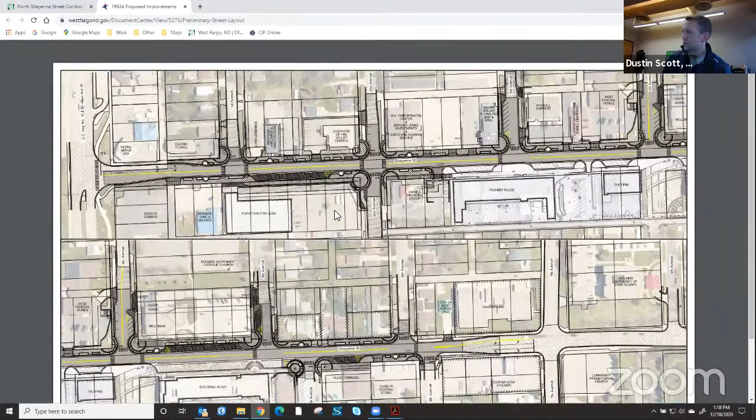So what you see on the screen now, I hope, is the street view, proposed street layout. On the left side of the screen, on the top left, is the north side of the project. I hope you can see my cursor. This is the intersection at Main Avenue.

As you can see, the project continues south, often referred to as a road diet. The intent here is to narrow up the street in terms of the traveled lanes, basically removing the center turn lane that is currently in place and going down to a 2-lane street section with on-street parking on the west side, as well as some on-street parking on the east side, a little further south towards the project limits.

We are also taking the opportunity to redo some of these side streets. Starting especially at 3rd Avenue, and then of course at 4th, we are also adding some parking onto those side streets as well.

Now coming down to the bottom half of the screen, starting on the left side here is the intersection at 4th Avenue, right across from the new plaza, Sheyenne Plaza. Now moving south, which is going right on your screen, we are finally transitioning into just past 6th Avenue, where we're going to tie into the existing street section.

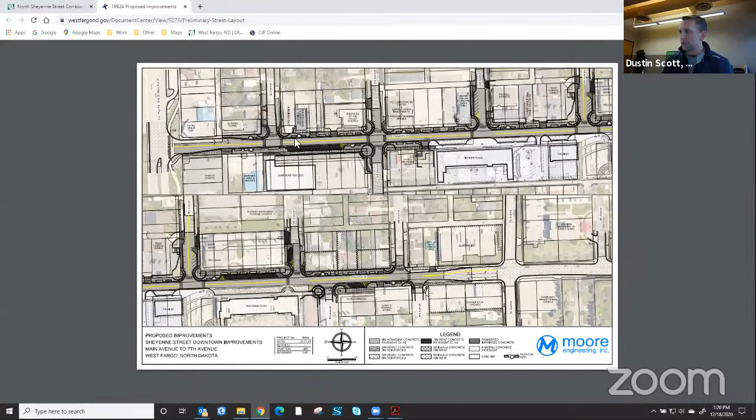I'm going to go back to the website here, and right underneath the preliminary street layout, there is a preliminary utility layout. I'm going to click on that.

What originally started as a surface project, in 2018, we received a $2.4 million grant from the state through a new program called the Urban Grant Program, which is really in line with Governor Burgum's Main Street Initiative. We were awarded that grant in 2018. We originally started with just the mindset of transforming the surface, basically focusing on that road diet concept, to continue the transformation that had started with that first redevelopment project, the Sheyenne Plaza downtown.

However, in 2019, we were also in the middle of our core area infrastructure study, which pretty much wrapped up towards the end of 2019. One of the results of that study was that the underground infrastructure along this corridor was identified to be in very critical condition, with water mains being asbestos pipe, and aging well beyond 50 years. Storm sewer lines were well undersized, and again, that age certainly extending. Some of it, part of it, was beyond 50 years. There are other portions that are a little newer, but still, even the newest portions of the storm sewer are getting to be about that 25, 30-year range.

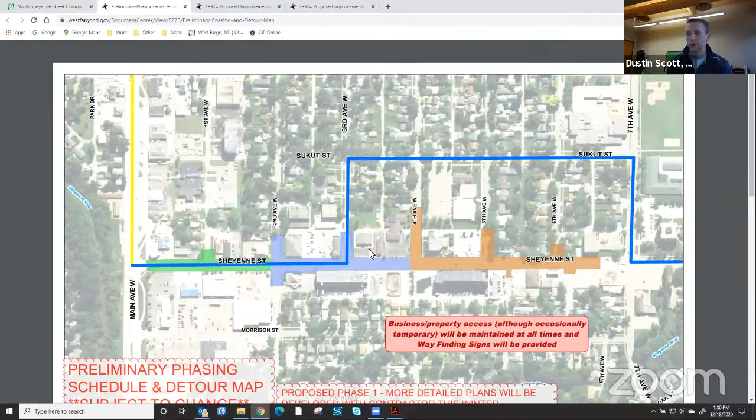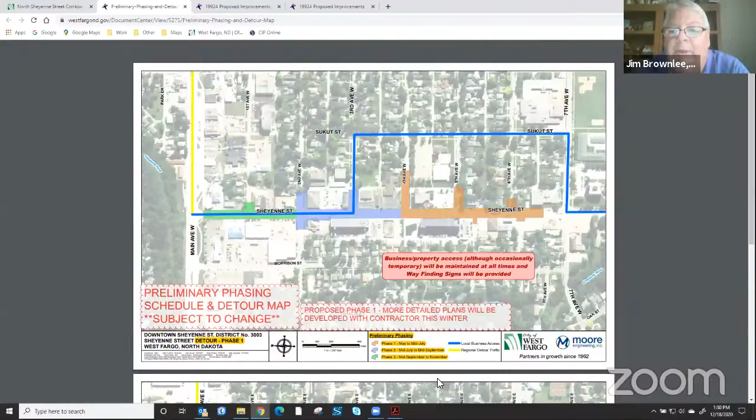Okay, so again, for the public, if there's anyone watching, there will be a pretty significant time lag between this discussion on methodology and when we actually get to certifying assessments against a property. It'll be several years before we probably get to that.

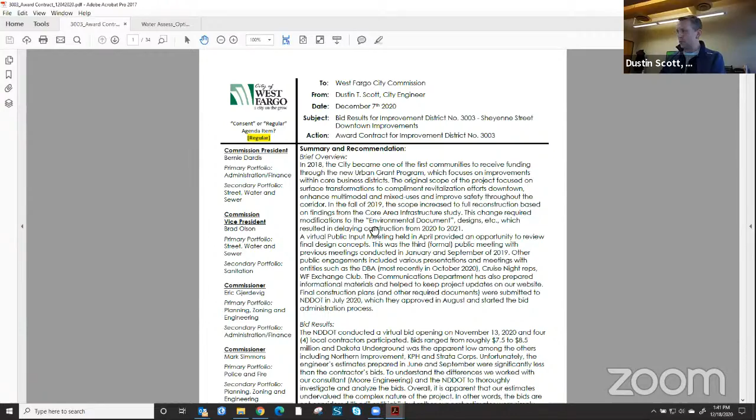Thank you. So as I mentioned earlier, when we asked the city commissioners to award a contract, we included some of the preliminary assessment information. The reason why I'm showing it within this packet here is just so commissioners and any of the viewing public are aware that this material has been publicly provided through that December 7th commission meeting.

However, I will point out that even though this preliminary assessment information was included with the city commission's packet, they did not take any formal action on this particular map that you see on the screen, or the next page here with the preliminary assessment allocations. They're not necessarily taking action on this. We provided it so that we have the opportunity to start at least projecting out what these preliminary assessments might look like.

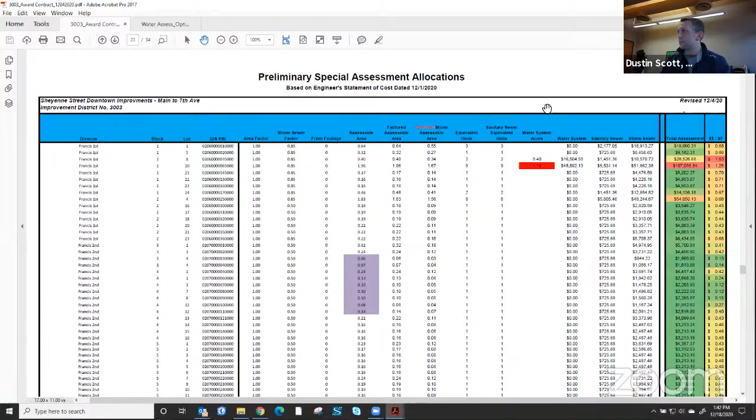So really, there are a number of ways to boil down the assessments here, to look at allocating out each of the components of the project. And we got to a point where we moved this particular option forward. I do have some other options I can certainly show you, but I want to start with what was presented to the City Commission, and use this as a starting basis.

Which reminds me, I should probably also touch on the fact that back in June, when the City Commission did review the engineer's report, they did direct engineering staff to revise the preliminary assessments that we had developed at that time, so that we were not assessing out any of the street components of this project. So when we did bring the bid results to them, as you can see here on this map, we do have our original assessment boundary here, described by this black dashed line.

However, all of the parcels between the black line and the red lines here, you'll see there's no color, east of First Street. That's because we originally created the boundary as large as we did because of the street component, but once they asked us not to special assess out any of the street costs, that started to revise this boundary to a smaller area, because these utilities we are replacing are not major utility networks.

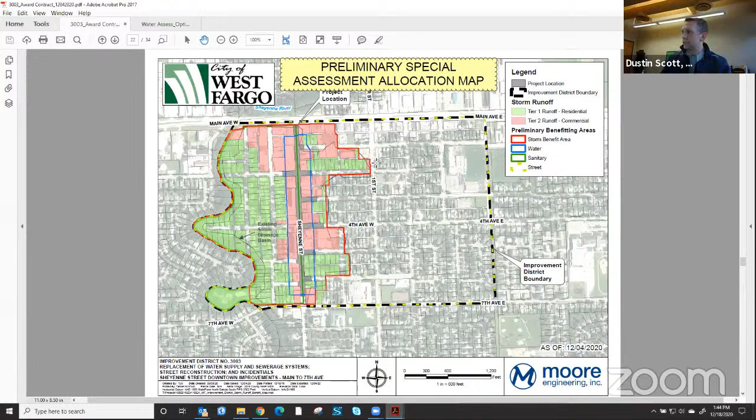Like I just covered, the black dashed boundary is what was originally approved by the City Commission. Just to show that in a different format, here is the district boundary map that was approved by the City Commission when they created the district.

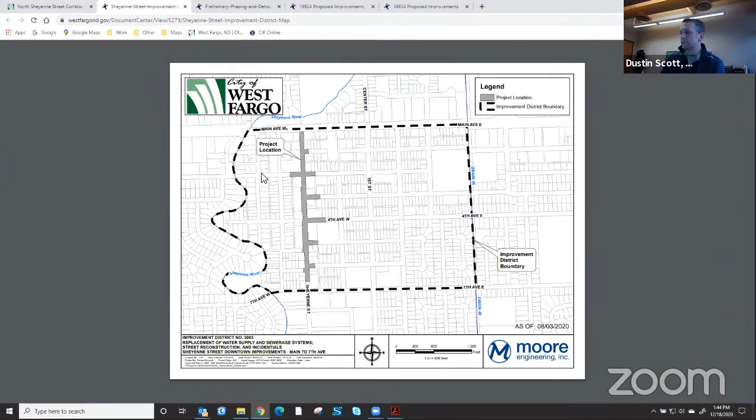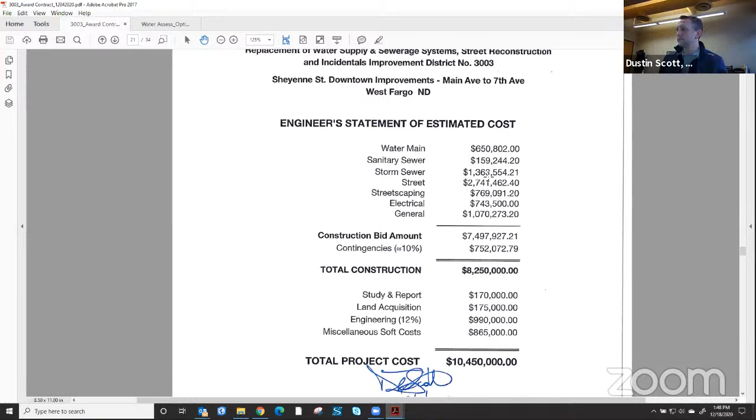So you can see here there's not much on the sanitary sewer, but those particular costs were put into a spreadsheet where we could then start looking at these benefiting boundaries and allocating each of those costs accordingly over these boundary areas. So for example, that $160,000 of sanitary sewer being spread over the parcels that are pretty much between the river and Sheyenne Street.

Properties that have townhomes or apartments, certainly commercial buildings that have parking lots, have more impervious surface, which means they generate more drainage into our system versus a residential property, which typically has anywhere from 30 to 50% impervious surfaces. That changes property by property, but what we tried to do is lump them into, at this point, two categories. So that's what we created here, a tier 1 runoff. It says residential, but I know there are a couple non-residential properties included with this based on how impervious they are.

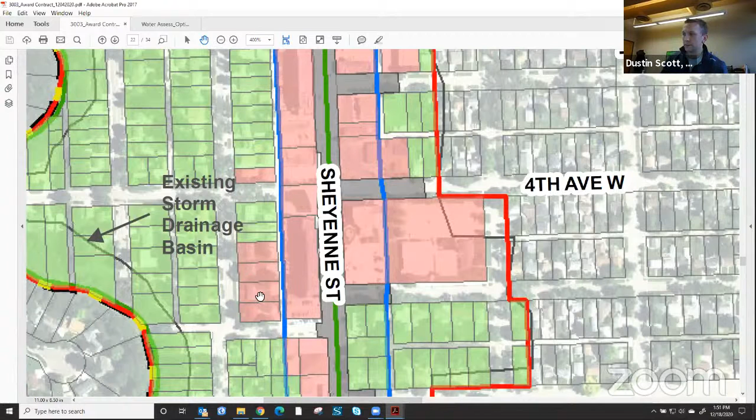As I zoomed into here, I think these are twin homes or townhomes, but again, they hit the threshold of being a little more impervious than a traditional residential property.

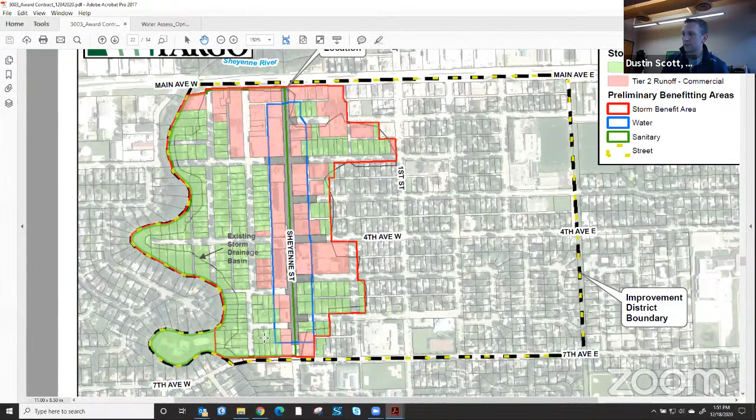So we use that tiered system to distribute the storm costs differently. If we have $1 million worth of storm sewer cost to allocate, it goes to all of the properties within this red boundary. But then there's a factor applied, and I believe it was about a 75-25% factor. So back to that $1 million example, $750,000 is applied over these light red parcels, whereas $250,000 is applied over the green parcels.

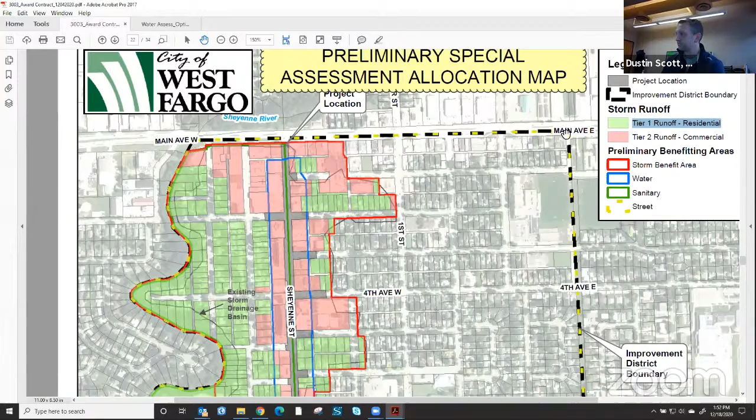Don't quote me on the actual numbers or even that percentage, just try to understand the concept that we are trying to identify two tiers to distribute that storm sewer assessment. I'm going to pause and see where the commission has questions relating to this benefit map.

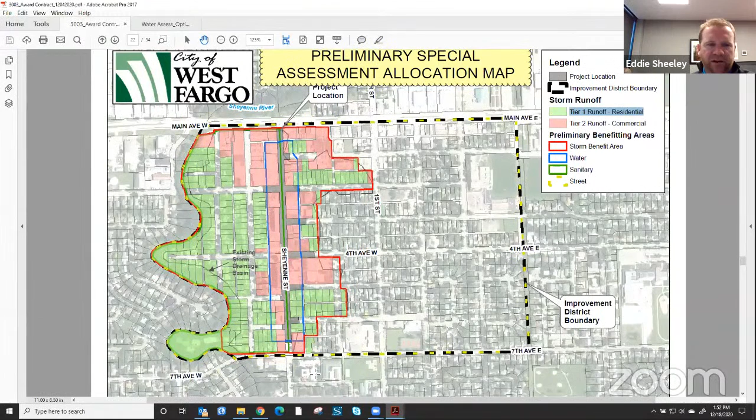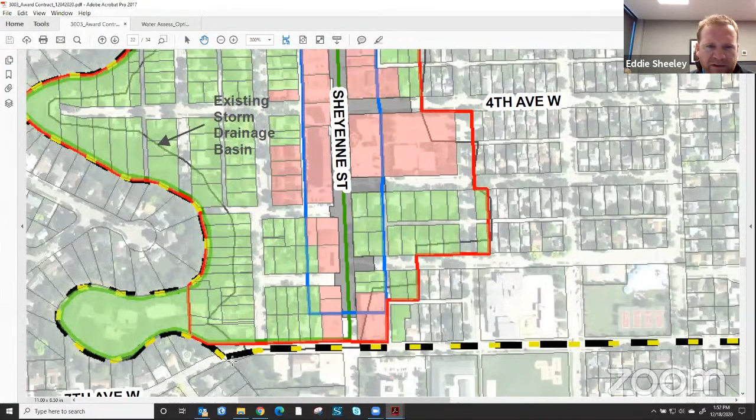Okay, Dustin, just one question for me. There's that property on 7th, on the south side of that map that's in green, that's outside of the storm benefit area. It looks like it's the only red or green property that's outside of the storm benefit area. Was that supposed to be included, or was that meant to be excluded, and why?

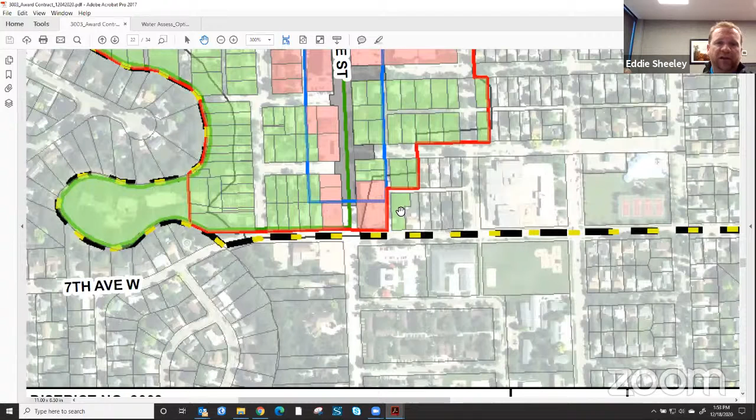Thanks, Commissioner Sheeley. You're referring to the property just on the north side of this 7th Avenue label here? Nope, go east there. Outside of that. Oh, I see that too, yep, that one there too. Is that a residential property there? Yes. I'm not exactly sure why that residential one is showing up like that.

I will say the one to the west, this condo parcel, it's got a few different buildings on it where there are condos on this peninsula. They are shaded because they are receiving a storm sewer assessment. All the properties between Sheyenne Street and the river are going to get a sewer assessment, but their property clearly does not drain into the system. In fact, all of their property drainage enters the river directly.

I understand that some of that is the case for some of the properties along the river, that a portion of their property drains naturally into the river. I do want to point out that, like with other projects, it is within our special assessment policy that we discount 100 feet of riverbank property excluded from the area calculation when assessing the benefit for storm sewer. However, the property that you originally questioned, this one here...

I guess I don't quite know, and I'm not sure at this point if they actually did receive an assessment. I would say the answer would be no, being that they're outside of that red boundary, but I'd have to defer that and get back to you. The idea being that they would have to be in these boundaries in order to receive an assessment. So unless we go back and look through the detail and find that this red line should have been moved over 1 or 2 lots, then I'd say they are not receiving an assessment.

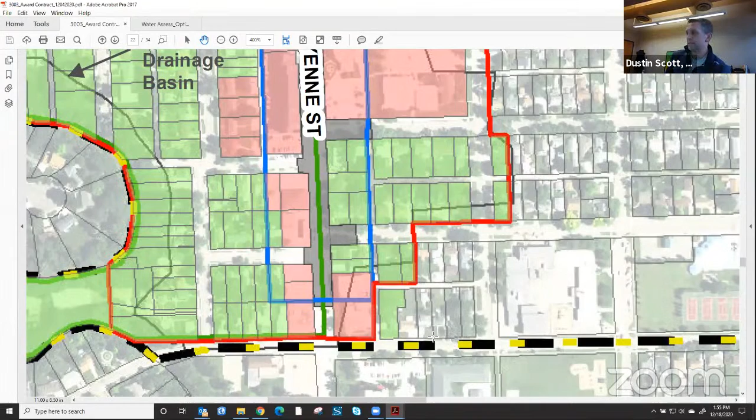That again brings up a good point, that these are preliminary. So I fully anticipate that there might be a property here and there that we didn't quite get correct. Great question though.

So with that line going through that you've identified as the existing storm drainage basin line, if we follow it around on the outside edge, on the east side of Sheyenne, anything to the east of that line is going to go to a different storm drainage system. Is that correct? That's correct, Commissioner Anderson. I should have probably pointed that line out during my review here.

That line is based, for the most part, on LiDAR imagery. What we haven't been able to do, and we don't intend to do either, because it's well beyond anything that would be expected, is a complete ground survey, a full topographical survey on the ground to identify some of these things.

But we did take the opportunity to at least use some of the technology available to us, which allowed us to establish what the drainage basin is that comes into our system.

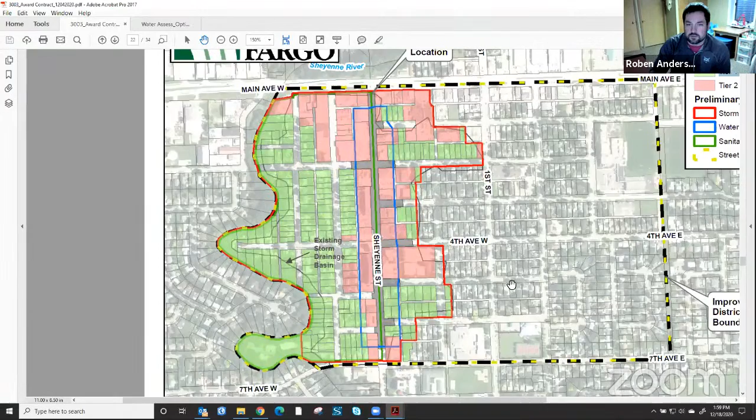So does that answer your question, Commissioner? Yeah. And then it's important, at least to keep in mind, everybody, when these other projects do come up, that we aren't double assessing them. Basically, we're not assessing them for two projects if their property happens to straddle a line, or call it a hill or whatever.

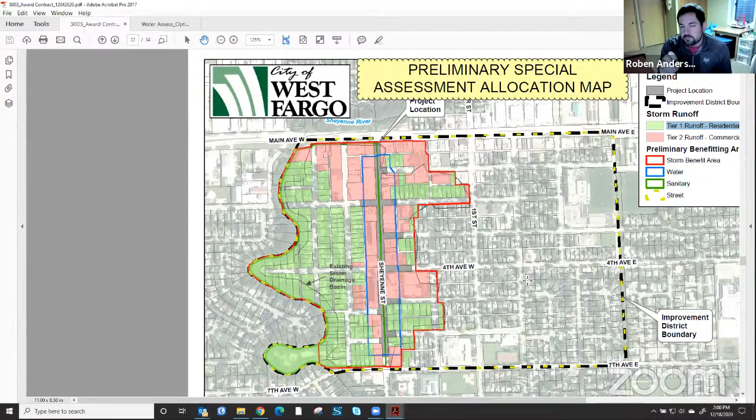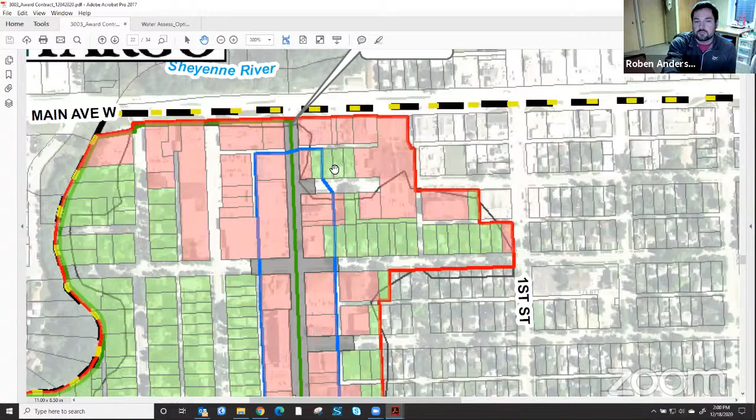Couple questions around this red boundary here. One, I see the line go through the one property along First, which I assume is the fire department, and then our fire station, and then over towards Main Avenue between the PetroServe lot and the school district. There's a group of 6 properties there that seem to fall outside of the line, if you will. So right in the middle there—the 3 green, and then the 3 just to the north there that are red. None of their property seems to touch that line, or that line doesn't go within any of their properties.

I understand that it's a nice, easy cutoff for this boundary, but I want to be careful personally. If we move forward assessing these properties for this storm drainage, and then another project comes down the road and we assess that, we need to make sure we're remembering what's going on here, if that is the case. And is this the right project to assess to the properties? That's kind of my concern, my questions there. Again, I just want to make sure everything is fair once we do assess the project, and that everybody's contributing their fair share. So absolutely, that's why I bring it up.

Very excellent points. And maybe just a brief specific answer to that cluster of properties you mention—there's also another factor here of where do we want drainage to flow. In that particular area, even though the LiDAR has some fluctuation in how accurate their elevations are, their drainage is and would be intended to benefit from this area. So even though there might be a small portion that might shed some water somewhere else, it's really intended, when we look at the rest of our infrastructure, to come into the network of pipes that ultimately will drain through the lines on Sheyenne Street.

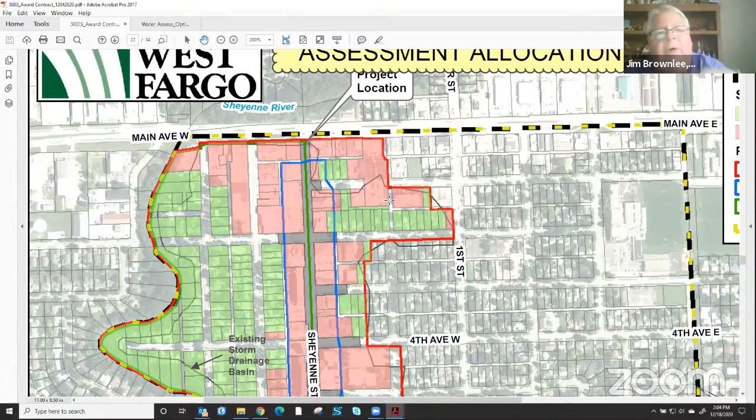Dustin, following that line, when your water line stops a block short of Main Avenue, that project already gave them new water lines, so they're not in this water line district? It's 100% correct, Commissioner, Mr. Chairman.

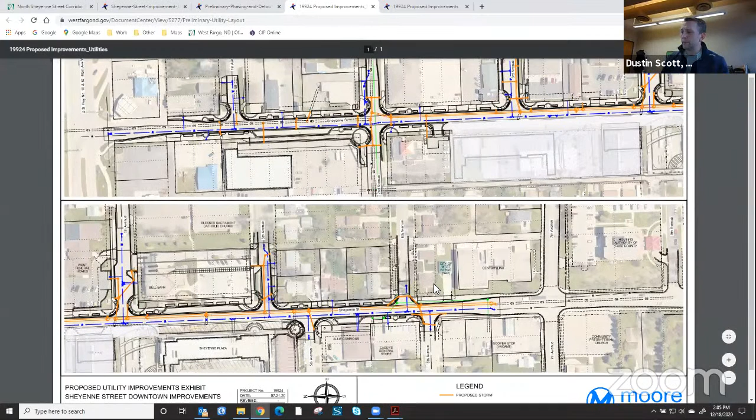Yes, and that is a good segue into the water main component here, which, similar to the stormwater, has some uniqueness and challenges, with the service lines being specifically one of those challenges. I'm going to go back to the utility map and highlight some of the areas that have direct service lines to the buildings. This is why earlier I made a point that water has different benefits other than just bringing water to a building.

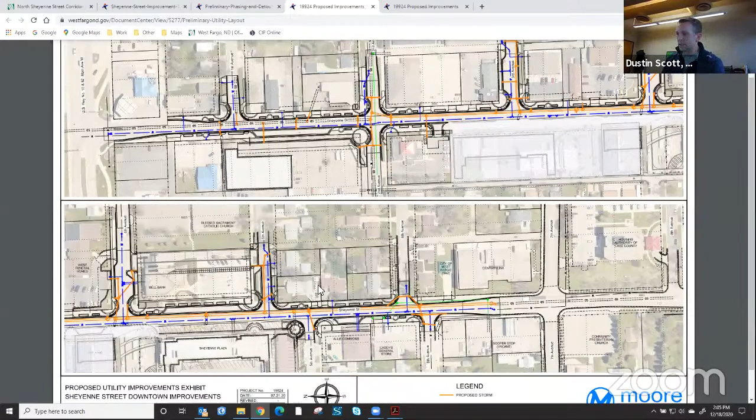Within our project itself, there's an example of a cluster of 5 residential properties here. A couple of these residential properties have their service lines directly on the water main of this project. So there's 2 that are on 5th Avenue, which is getting some water main replacement. Then there's the one property on Sheyenne Street with the water main or water service replacement. And then there's the 2 properties right next door that have water service off of 6th Avenue.

Some of this information still needs to be verified when we're out in the field, but we're pretty sure the property furthest to the east has a water service off of 6th and is outside our project area. The property on the corner of 6th and Sheyenne, we don't show a new service line into this building. Now we might start working out there and realize their service actually does come into where the new project water main is.

But I bring this up because if we were assessing only properties that are going to get a service here, the struggle becomes that these 3 neighbors are getting an assessment but these 2 neighbors are not, or maybe this is the lone person not getting an assessment. That's part of what we want to discuss. I'm not trying to say what's right or wrong, just pointing out some of the challenges. That's kind of Commissioner Anderson's point, that once we start drawing a boundary, we need to adhere to it in the future.

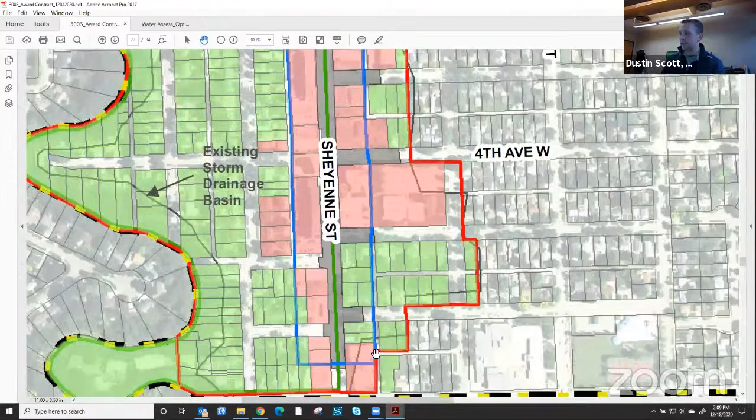And that goes not just with the water, but it's also with the storm. Again, part of what Commissioner Anderson had pointed out, and Commissioner Shealy also pointed out, there's a parcel down here that's shaded green, but they're not, they're right next to the boundary, but they're not in. This is exactly where it gets to be a little challenging in trying to draw these boundaries.

Part of what the Century Code lays out is that part of my responsibility as a city engineer is to help establish these benefiting boundaries. And then more importantly, it's the job now of the Special Assessment Commission to review this information and then make decisions on how to allocate the benefit, which is, again, pretty much identifying these boundaries.

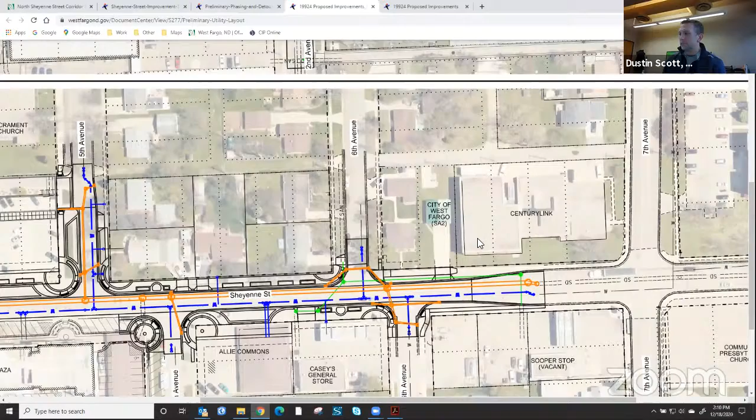So again, going back to some of the other water main challenges, it's just a matter of this water main, albeit functioning more as a local water main system, there is still some benefit in having fire protection, fire flow, and some of that other discussion that I pointed out earlier.

All said, I could walk through a lot more examples, but the water and storm are both predominantly that challenging utility in terms of trying to identify that benefit. What I can show you today is the map that we've been reviewing, which is what we presented with the package on December 7th with the City Commission. I can also show you some of these other options that Moore Engineering helped create, so we had a good discussion on.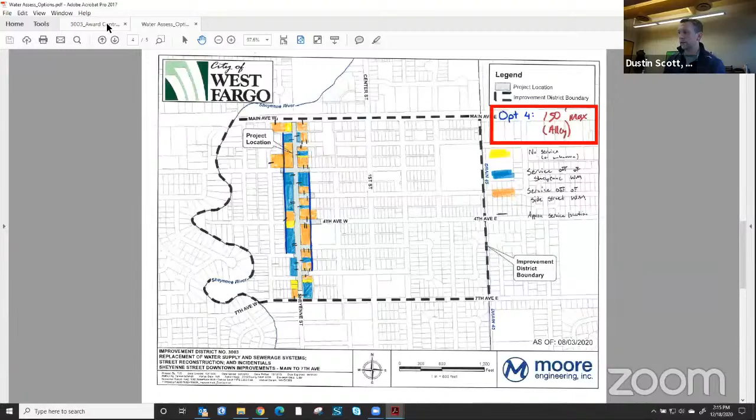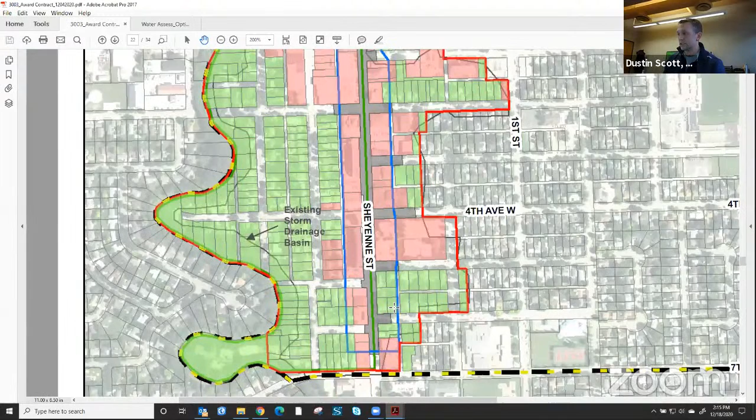Here's basically the option that we show today. Quite frankly, we went about roughly 150 feet on each side here to establish a more uniform boundary. However, as I pointed out in doing so, we, for example, include a parcel in here that technically doesn't have a service line being replaced.

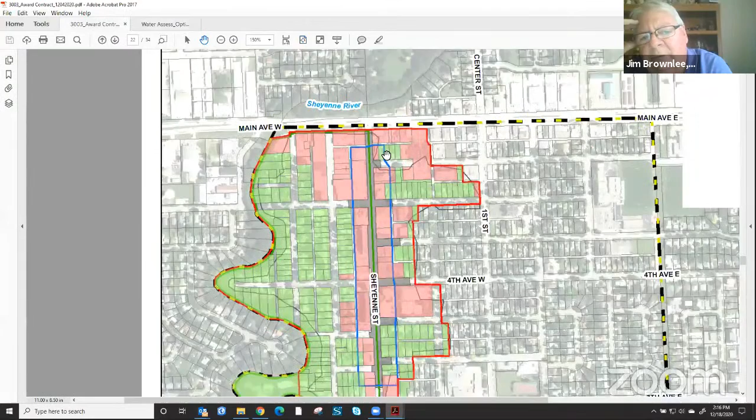Okay Dustin, just again on the water lines, we're assessing them on a square foot basis, on area basis, area calculation? Oh, great question. I'm going to pull up some of that information here. Yes, it is. I will say it is on a square foot basis, which again is a little less traditional. Let me find it.

Okay, so I'm opening up our sheet so you can see that information.

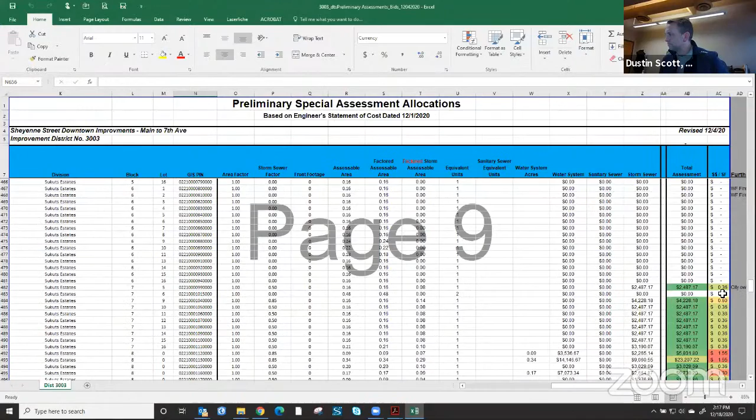So yes, both the water system and the storm sewer system are being assessed on a square foot basis, with the sanitary sewer system being assessed on an equivalent unit basis.

Part of the reason for doing so is, again, with the irregular shapes of properties and some of these boundaries, to try to go with, say, a front foot system, which traditionally we'd use with other projects, picture a greenfield development where we're putting in brand new sewer, water, and streets. It's a little more of a traditional neighborhood where it's easier to identify the front footage and so forth. Whereas here, some of these properties are so irregular in shape that we felt there would be more discrepancy or differences that wouldn't adequately reflect using a front foot basis.

I'll use maybe that furniture for less parcel again. It's a big L-shaped parcel, and for example, if we were to consider front footage there, but yet we went back to, let's say, this concept, they don't have a service line, so are they getting a front footage or not? And if they are, their front footage is quite a bit different than, say, the new firm building that's being planned downtown.

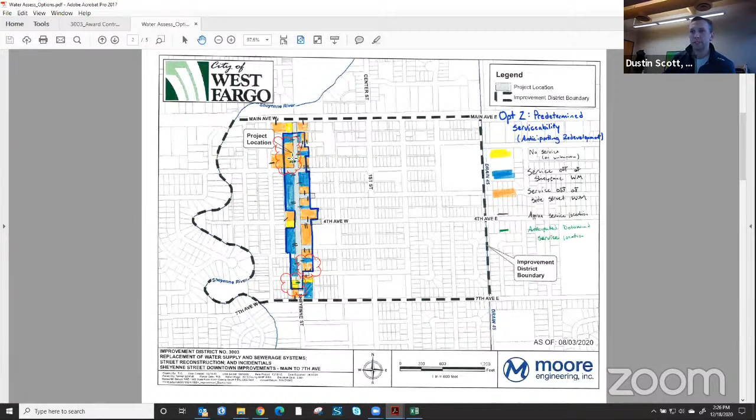It's maybe a little apples and oranges, but it's all fruit. I still don't like it personally, because I don't want to be stuck with a potential future development that's really unique, and now we say well, because we assessed out Sheyenne Street, you need to do this. So,

You're basically anticipating future development. At this point we're saying, look, regardless of whether or not you redevelop, you're just going to be included in the Sheyenne Street assessment, which means you'll be excluded from the local water main on either side of you.

So it's like, maybe it's hard to draw a boundary, but if we want to come up with a policy that says you'll only get one arterial road assessment, then you just draw a hard boundary and say all properties within this boundary get this arterial road assessment, even though your driveway might sit on a different road, if that makes sense.

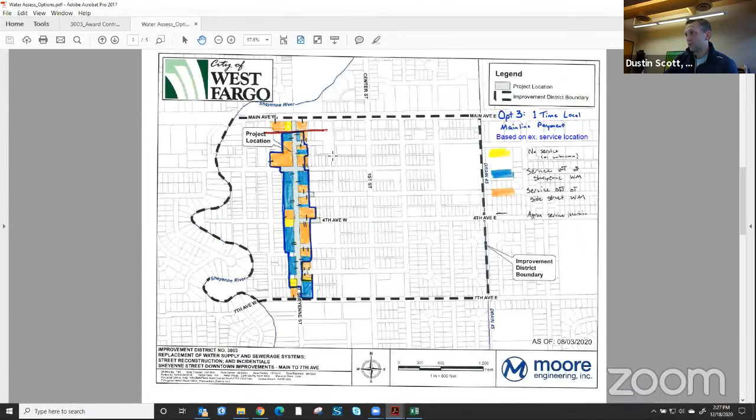And then of course we have the option we provided in this map. So really these first few are variations of the same concept with a little different twist—they're based on the services, whereas what we've selected here is

establishing more of a 150-foot boundary, with the notion that it's not just the service lines that matter here. There's also some, I'll say the easy-to-follow things like fire coverage, some of that stuff.

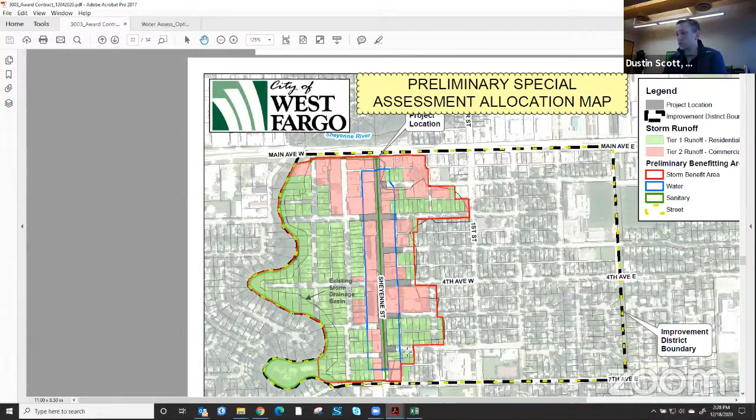So again, with this, I would propose—going to this residential scenario—that these parcels in this boundary, specifically the one I'm hovering over, when we reconstruct 6th Avenue someday in the future, that they not receive at least a local water main assessment for that project, because they're going to get a local water main assessment for this project.

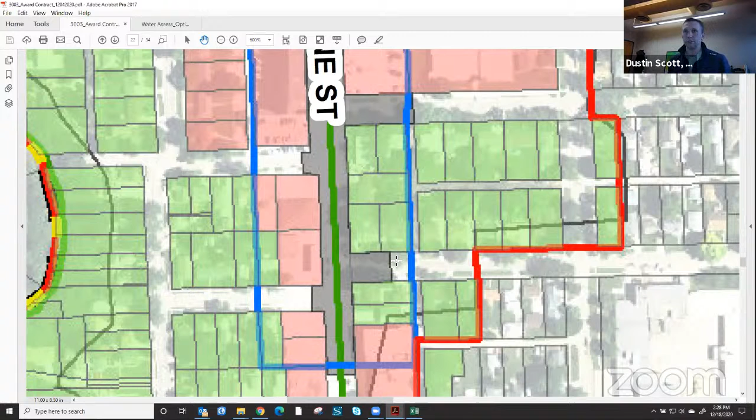But again, I'm sure John would be quick to point out that I don't have the authority to dictate how a future district will be administrated. So all we can do is create some policy, and the assessment policy we do have is somewhat left with the ability of displaying discretion on each district.

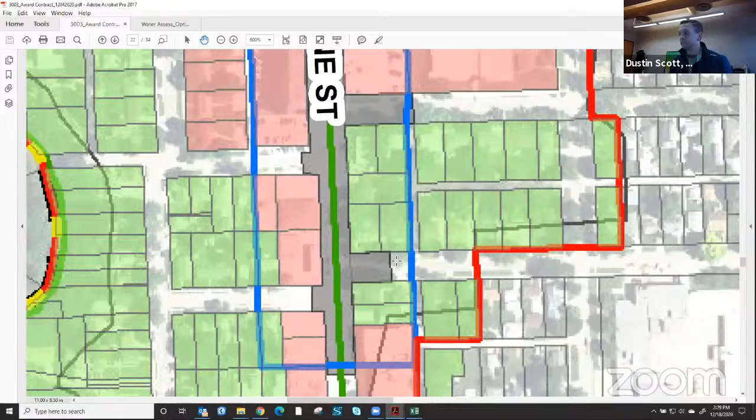So as part of this water project, is the main trunk line right under Sheyenne Street?

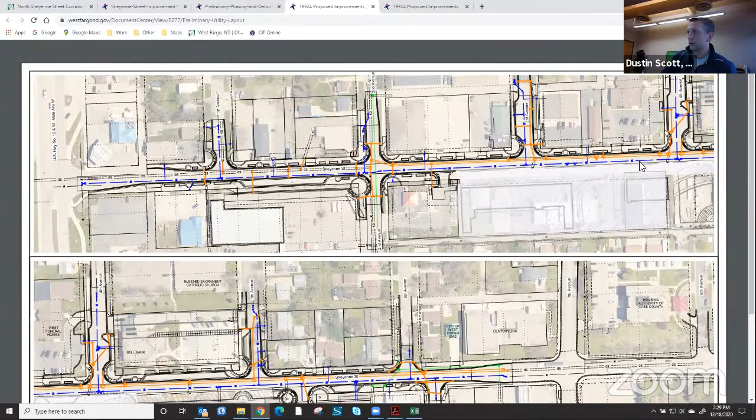Yes, so there is being replaced, right? Correct. And there are some water mains being replaced on those side streets as well, as you can see here. So Eddie and Robert, what I'm thinking is that you're replacing the main trunk line, so there is going to be benefit. Even if you didn't get a local line put in, you're getting your main trunk line replaced, which everybody has some benefit from. Wouldn't you agree with that, Dustin?

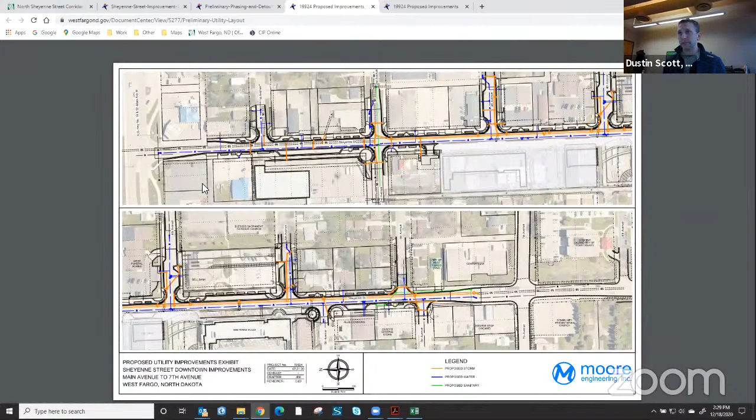Yes, it's not a 16-inch transmission line like we have over on First Avenue that serves, that's part of our transmission system, but it is still, call it a local main line that has that additional benefit of providing fire flow, fire protection, and also keeping the network functioning at a much better operating level than if we had disjointed networks. So there is a larger benefit than just an individual service line fed off it.

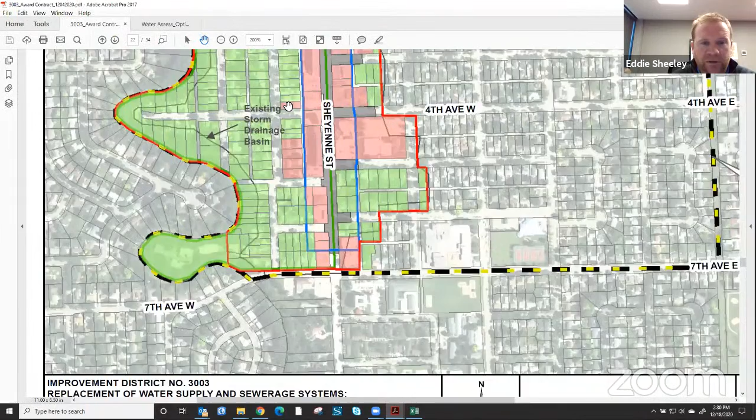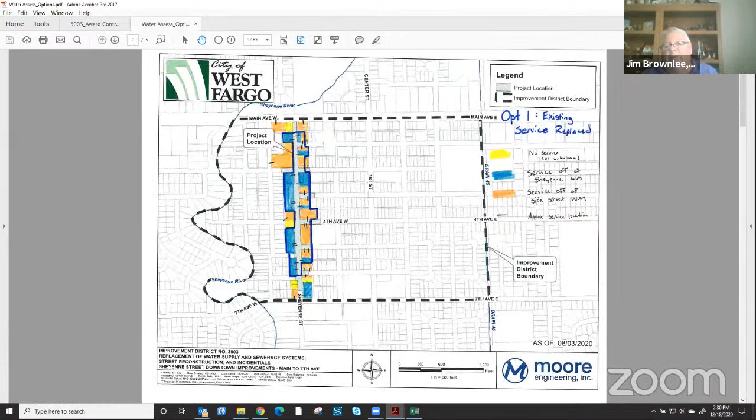I agree. I think I like option 4 the most, with the 150-foot boundary. To me, that seems the most fair of all the 4 options, but just my opinion. Yeah, that's kind of where I was going, is that everybody's getting some benefit from this water line. I don't think it's fair to exclude a property that's getting some benefit because they didn't get a local line. They're certainly getting a new main line in there somewhere. So I'm kind of leaning that option 4 looked pretty good to me.

Robin, which of those do you like better? As far as what I'm seeing here, option 4, I think looks good.

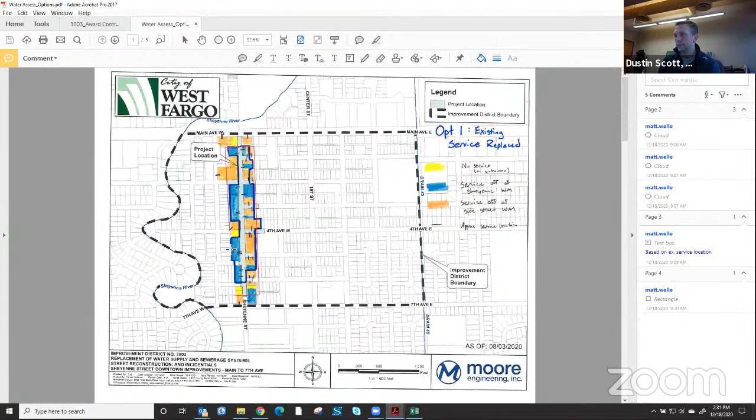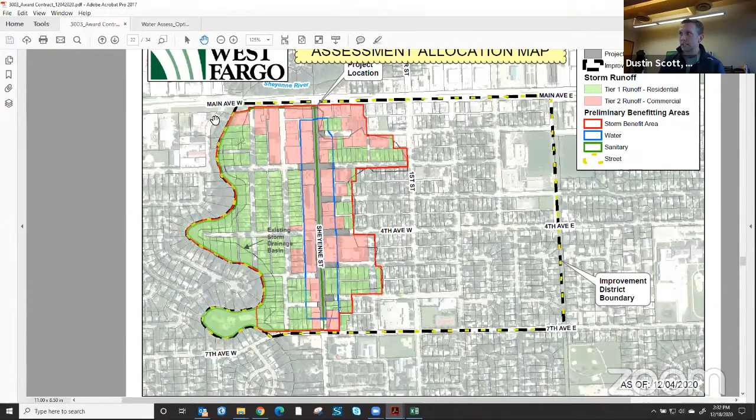Yeah, so really, and forgive me if this isn't 100% matching, but this red line that I just drew here is what we, for the most part, show and have been proposing. So that's where you can see the properties that are in or out, based on that particular discussion. Again, this will be brought forward in a more formal capacity. I certainly want to get this feedback prior to us publishing the proposed assessments that we showed within the commission packet. So before we publish this list, this is why we wanted to get these comments.

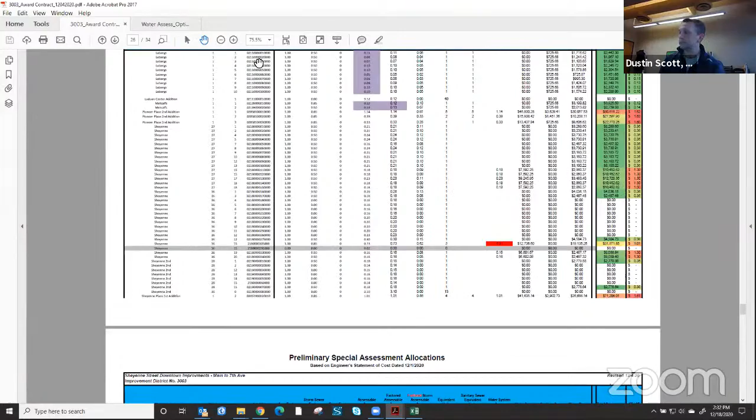And if there was something that you'd like to see, or that maybe you disagreed 100% with, or you just wanted to throw out something else, we can maybe try to work towards that before we publish these things. But again, I'll just reiterate that the decision-making time will come towards the end of the project.

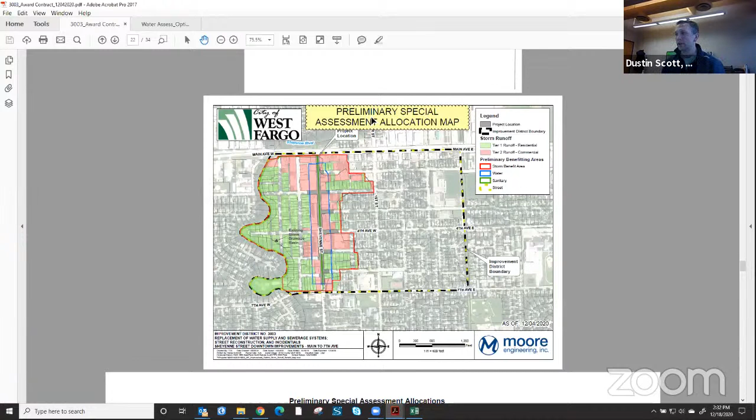Okay, so the preliminary assessments that you have drawn out are using that blue line for the water. Yes. Okay, and then a square foot calculation within that. That's correct, Mr. Chairman, and that's what you can see here on the spreadsheet that I just opened up.

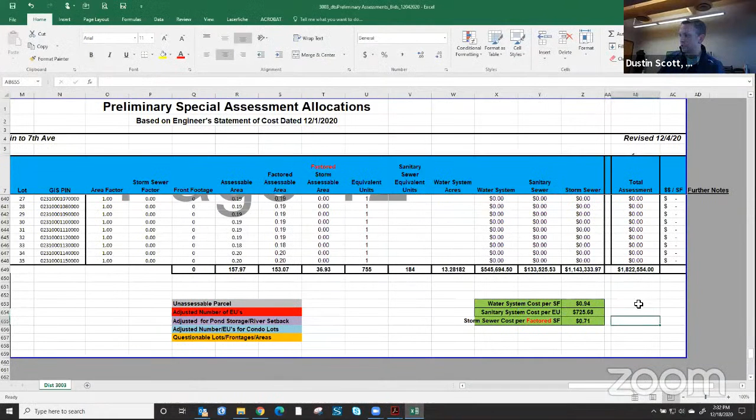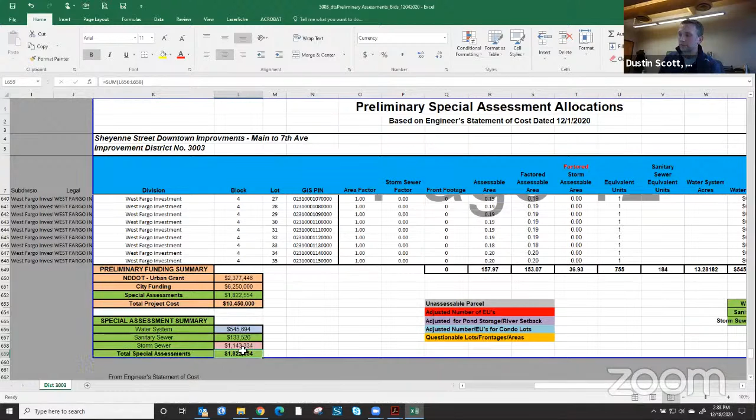And this is where we've taken, maybe I'll zoom over here. This is where we've taken this $1.8 million that the city commission had mentioned. We divvied that out amongst the water, the sanitary, and the storm. So that's where we're getting now this $545,000. Again, this is an estimated number, but that's what we are allocating over this blue boundary.

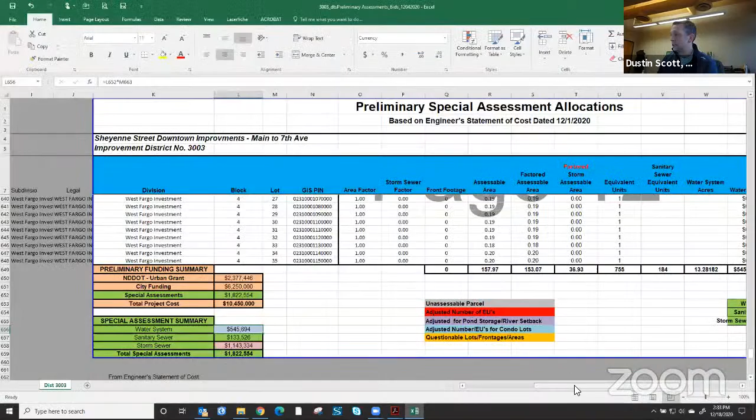So when you look at the spreadsheet, we create these columns here. So now this water column, this water system, this $545,000, only the properties in that blue boundary are going to show up as having an assessment in here. Or at least that's what we're proposing.

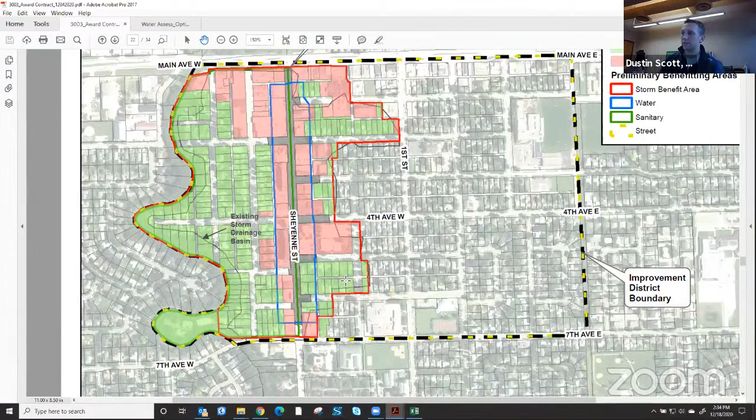Now, so far today, I've learned that there's at least one area to double check, and that's what Commissioner Shealy pointed out. Why is this parcel down here green shaded but not in a boundary? I'm going to confirm some of these things, but even if we do have a couple things that are off, which I anticipate we probably will, those will get corrected as we go through the certification process. So, great feedback.

Okay, so that's the water part. The stormwater, then the green and red, that's on your map. That's the stormwater one, correct, Dustin? The red being the storm, and now the green and light red shades. Yep, again the different tiers of storm, and then the green boundary being the sanitary sewer work.

So, maybe back to the spreadsheet, just to point that out, the sanitary sewer, $133,000 being assessed over that green boundary. The storm sewers, higher, that's we're at 1.14 of estimated cost, and so that's equating to roughly 71 cents a square foot.

But again, the storm sewer is a little different in that we have, as you see here, a factored storm area. So that's where if you're in this boundary, this red boundary, and your property is shaded green, your factored area is going to be based on... you're getting a 50% reduction, if you will.

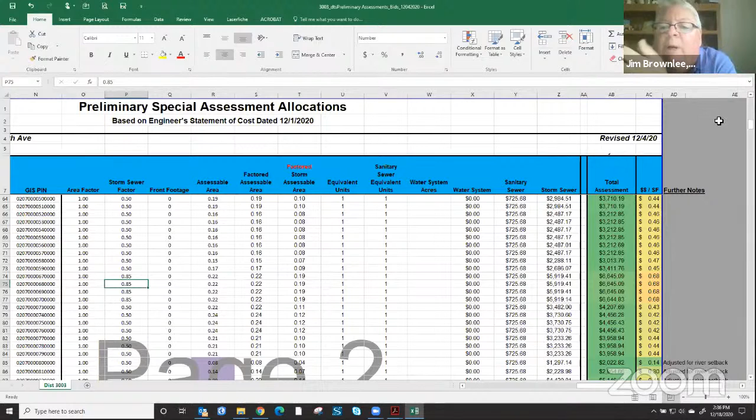And that's so because some are more permeable and some are less permeable? Correct. That was based on looking at the property and how much impermeable area was in it. So if it's all parking lot, they're going to get the 0.85. If it's residential, they're going to get the 0.5.

And that's correct, yes. And again, that's using LiDAR imagery. It's not based on a very intensive boots on the ground collecting survey. It's based on using the technologies we have available, which I believe would be more than reasonable.

I don't have much more to share as far as trying to go through allocating the benefit. I think there'll certainly be some discussions as we move forward with this job, especially as we get to the end. It'll be interesting to revisit this, especially once we've completed construction. It's a unique project, and there's more than one way to go about this.

One last question I have, Dustin, then I know Robin and Eddie probably have more. Those Main Avenue projects that are in the stormwater, when they did the Main Avenue project, was there some stormwater component to that, or is it all on this project? I appreciate that.

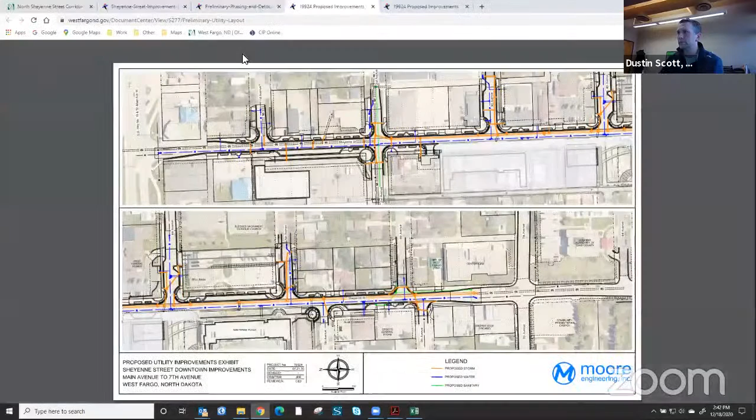One way to think of it like this: the sanitary work that is being done is not the local stuff. It's not the local line that is right out in front of a property or a building. Whereas the water main is a little bit of that, the sanitary sewer work we are doing with this project is more of a conveyance line that is taking sewage over to, say, a pumping station or a lift station.

So without this improvement, let's just say this particular sanitary work we're doing were to fail, and I was asked to draw a boundary along or around the homes or properties that would be affected by that failure - this is the boundary that I would draw.

But again, these properties aren't tied into this line with their services. That is a local line in front of their house. These lines are technically part of the system that enables these properties to drain into the lift stations that are near or around this area.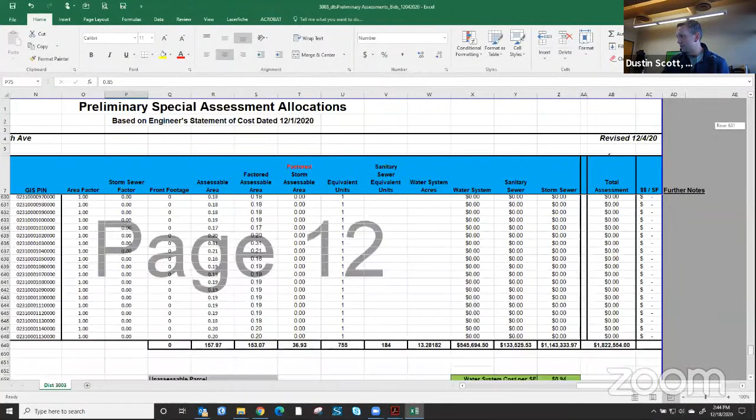Okay, and so the cost, if I remember right, was around $725 per equivalent unit. Just as a refresher, an equivalent unit in general is taken to be 10,000 square feet. So if there's a property out here that has 1 acre, that would equate roughly into 4.5 equivalent units for that particular property.

Generally, we treat single family residential as getting 1 equivalent unit. But again, I just want to give that baseline of an equivalent unit, which was established and is also in our assessment policy as being 10,000 square feet. Okay, thank you.

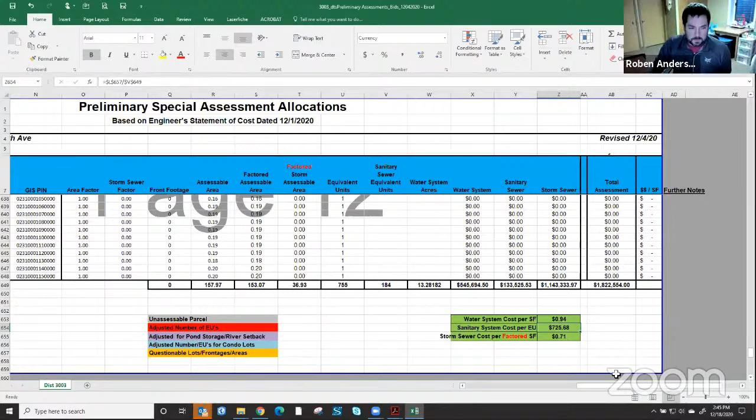Okay, Dustin, so to summarize the preliminary assessments you've prepared that you're going to publish - and again these are just preliminaries, nothing else - we're using the blue line for the assessment for water, the sanitary green line on a square footage basis, and the stormwater is based on that factor of whether it's permeable or not permeable, or more or less permeable. That's the assessments you've calculated so far.

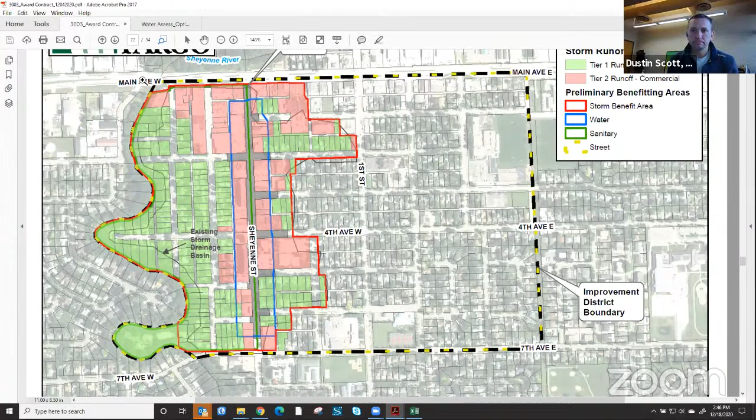Eddie or Roben, is there any changes to that methodology that you would propose? As far as methodology, I don't have anything. I just looked at the December 7th commission agenda where it has all the spreadsheets. I looked at that parcel that Eddie pointed out - that was on the list, down that lower right corner just north of 7th there. So you just want to double check that one, please. Absolutely, will do.

Well then there's also that peninsula, or the Oxbow off of 7th. Is that included? Again, it's outside the red line, Dustin, is all I'm saying. Yep, and that one I intentionally did not include within the red line - I intentionally drew the red line where you see it.

Okay, Dustin, is there anything else? It appears that the commission is okay with the calculations you've done for the preliminary assessments if you publish them. And again, we won't take any formal action because there's no formal action to take.